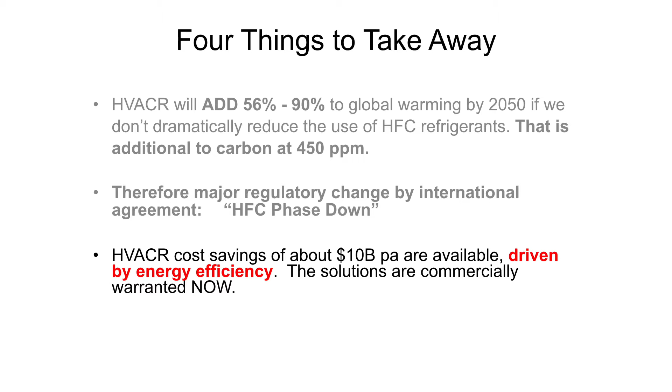In Australia, cost savings in the order of 10 billion per annum from energy efficiency in the industry. And because we're talking about a fundamental change in the refrigerants, future-proofing your investment in HVACR technology is about getting the refrigerant right.

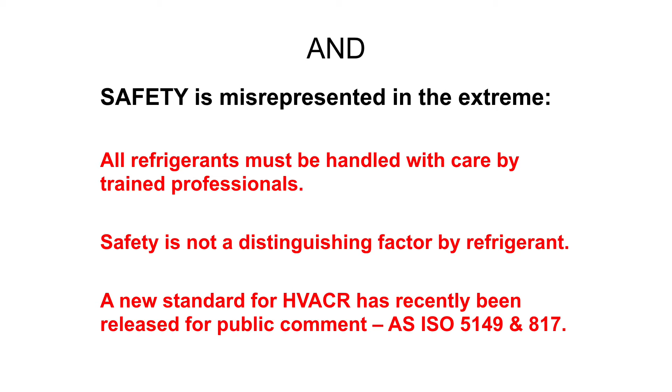I'll just touch on safety from time to time, but this is an important takeaway: safety in this industry is misrepresented in the extreme. The truth is that all refrigerants need to be handled with care by trained professionals. It's not a distinguishing factor by refrigerant—they're all dangerous. Competent people can make them safe, and the risk of an incident is vanishingly low. We're debating this matter nationally and globally because we have a new standard on the table.

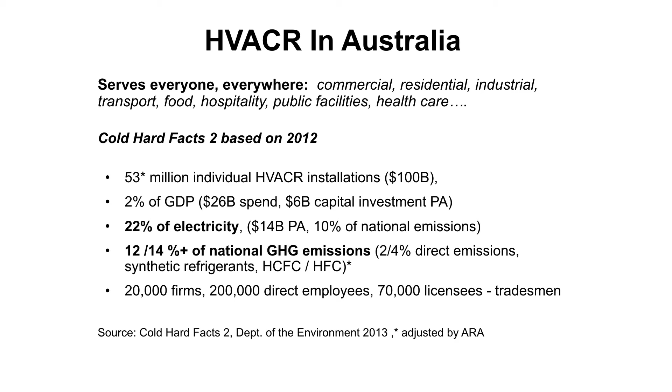Okay, so let me describe the industry. It impacts everyone everywhere, basically every industry. So 53 million installations worth about $100 billion in Australia. The industry consumes in excess of 22% of the electricity that we generate as a country. It generates, in my view, over 14% of national greenhouse gas emissions—I'll explain how I get to those numbers. And it's a highly decentralized industry: 70,000 tradesmen, 20,000 firms. How do you coordinate all of that? But that's the scope of the industry.

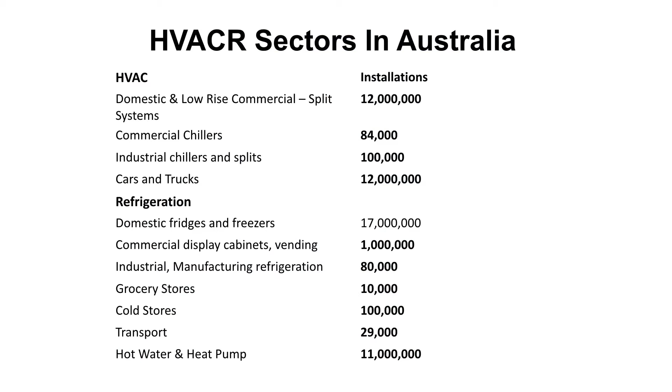Here's a breakdown by major sector, so you get a sense of the volume of installations. Of course, domestic, small units and motor vehicle air conditioning are big by number, but things like commercial chillers and grocery store installations are big by energy consumption and direct emissions. So we'll talk about that.

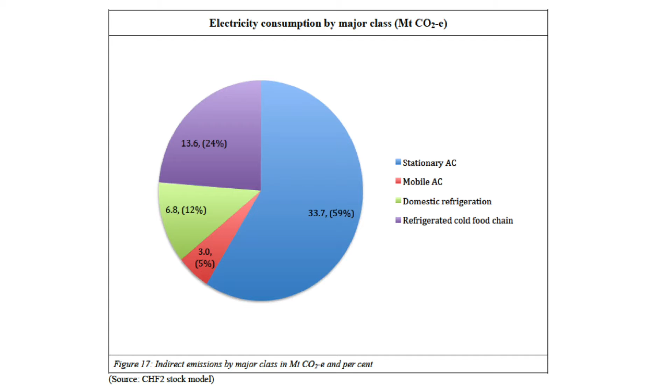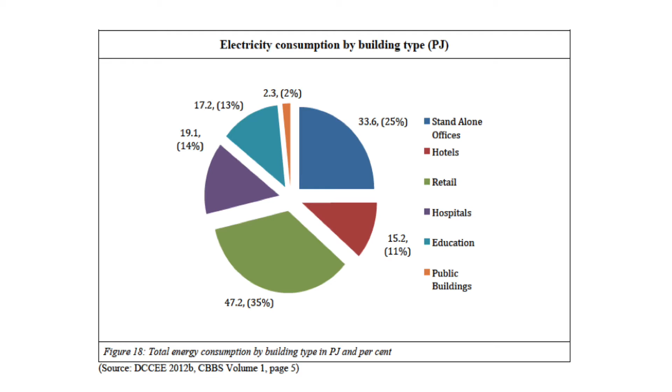Where does the electricity go? Today it's probably more like 60% going into air conditioning of all kinds, and 24% into the cold chain, which by the way isn't just about food—it's all kinds of things in the cold chain, but food's the one we think about. By building, in a sense, when I think about this chart, it's everywhere—there isn't a building discriminator.

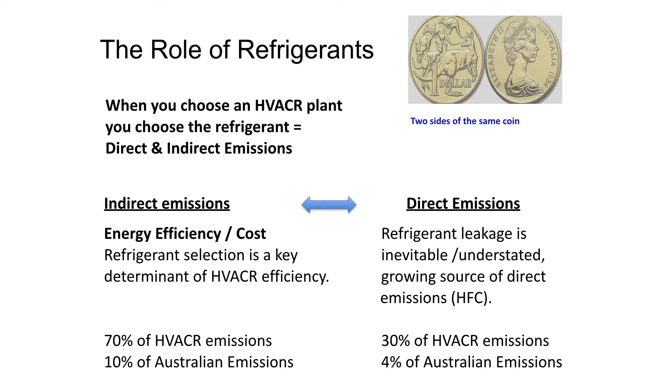So to understand the role of refrigerants, you need to understand that when you invest in a plant, or conduct a retrofit to align with the transition to low emissions, you're choosing indirect emissions through energy efficiency, and you're choosing direct emissions. So in Australia, 10% of national emissions are indirect in the HVACR industry, and about 4% is direct—and frankly, I think that number is higher, but I won't debate it.

So let's examine indirect emissions. The fact is that natural refrigerants are unarguably more energy efficient, better at heat transfer than synthetic refrigerants—that's just a physical fact. You can screw it up, right? You can have a good refrigerant and bad mechanical engineering and get low performance. But that's not the point. Use natural refrigerants properly with modern high-efficiency technology, and you will deliver, by definition, greater energy efficiency.

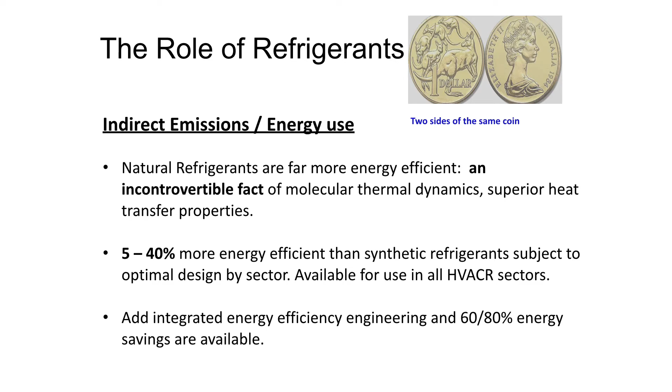So the range is extreme depending on the application. In motor vehicles, you might see in the order of 4 or 5% energy efficiency improvement, but in commercial and industrial refrigeration, in the order of 40%. Then add to that other ways of delivering energy efficiency, like better managing your heat load and control systems, and you can get up to 60 to 80% energy efficiency improvement. That's a concept I'll talk about later, but it's a very important idea.

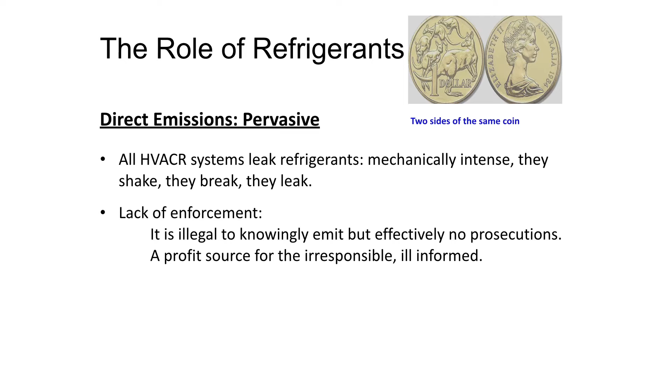Direct emissions: all refrigeration air conditioning systems leak refrigerants. They're mechanically intense, they shake, they break, they leak. This can be managed, but it's pretty much impossible to avoid direct emissions entirely—not the least of the reasons being that we don't enforce the prohibition. It's been illegal since 1995, and only one organization has been prosecuted. What's the message to the rest of the industry? Don't bother.

Particularly when it's in the interest of the technician or the service company to put more in during a recharge situation, therefore billing the client and making more money. Of course, as I say, low maintenance is an issue. And by the way, that big hit in terms of increase in direct emissions is principally the growth of HVACR in the developing world. But that doesn't let us off the hook, for reasons I'll explain.

So why are we in this crazy situation? Natural refrigerants are better in every way—I'll explain in more detail. And yet right now synthetics dominate the industry. Prior to 1930, naturals were the refrigerant of choice, in fact the only one.

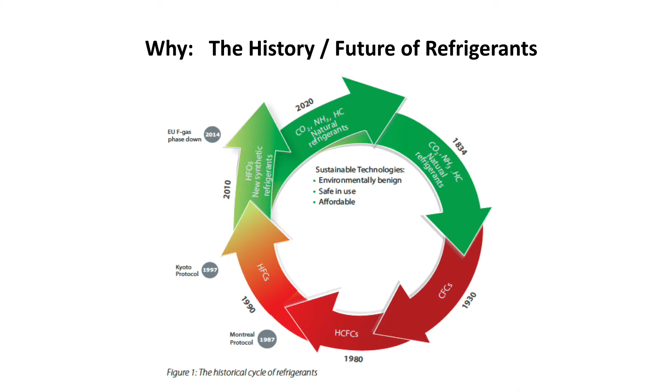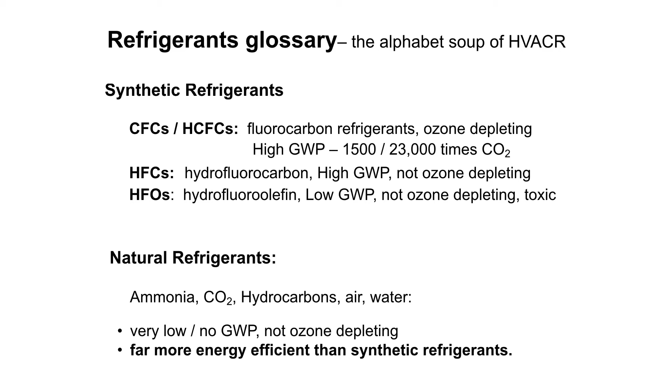Our engineering wasn't up to the task from a safety point of view, so we invented CFCs - problematic, leading to the Montreal Protocol. We invented HCFCs, slightly lower ozone depletion, both high GWP, and we're very close to getting rid of them. We moved on to HFCs, then the Kyoto Protocol. The future - and this chart I stole from Danfoss - Danfoss says the future is sustainable, low GWP refrigerants. The alphabet soup of the industry is tough to follow. The naturals - ammonia, CO2, hydrocarbons - effectively no GWP, not ozone depleting, far more energy efficient, and lower cost.

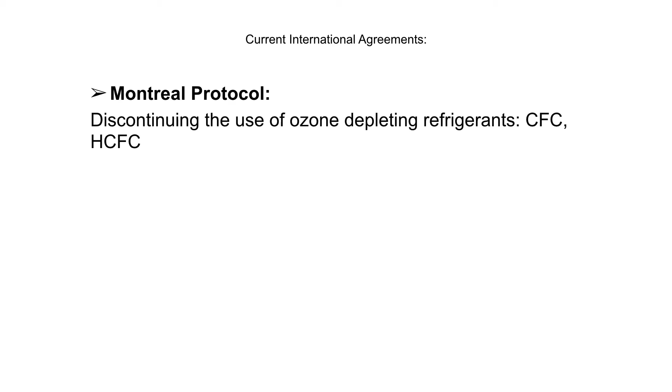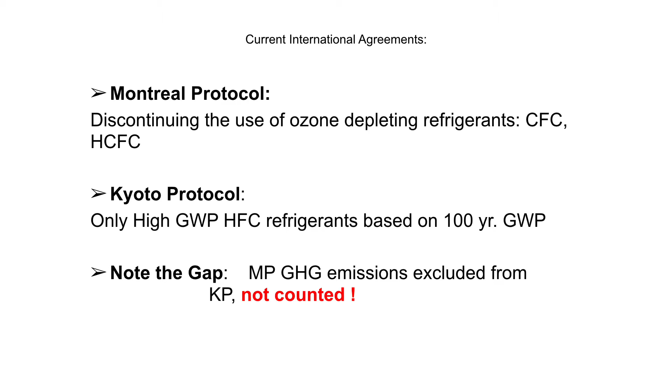So where are we right now in terms of international agreements? It's changing, but right now the Montreal Protocol is just about eliminating the use of ozone depleting refrigerants. That will change. The Kyoto Protocol is about counting the volume of emissions. But notice already a gap - the Kyoto Protocol does not count HCFCs and CFCs even though they're high GWP. This makes no sense, but that's the reality. And that's why our national inventory, in part, understates the presence.

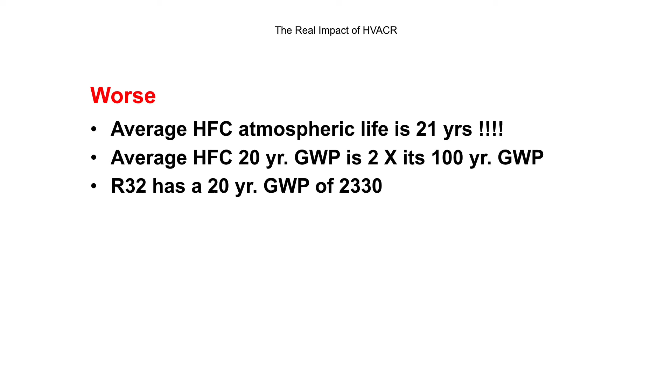Worse, the real impact of the industry is defined by these factors. The average HFC has an atmospheric life of 21 years. Its 20-year GWP is twice its 100-year GWP. So the Kyoto Protocol measures, and almost all of the work done in this field, talks about the global warming impact of HFCs based on their 100-year GWP. This makes no sense. R32 is a refrigerant being rolled out, promulgated worldwide, on the basis that it's a moderate GWP HFC - 675 on 100 years, 2,330 on 20 years.

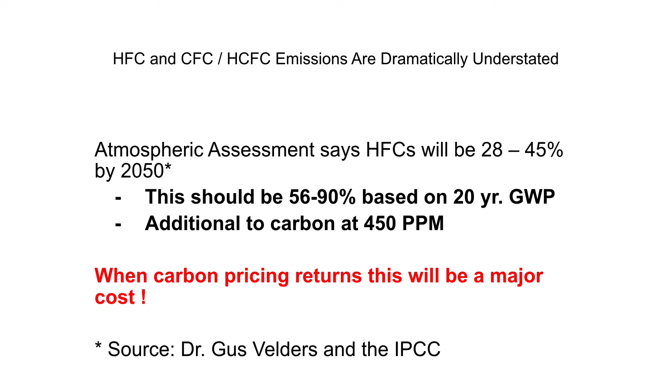From a cost point of view, it's inevitable we're going to have carbon pricing at some point in the future because it makes so much sense. When we have carbon pricing at 20-year GWPs, the cost of synthetic refrigerants will go through the roof.

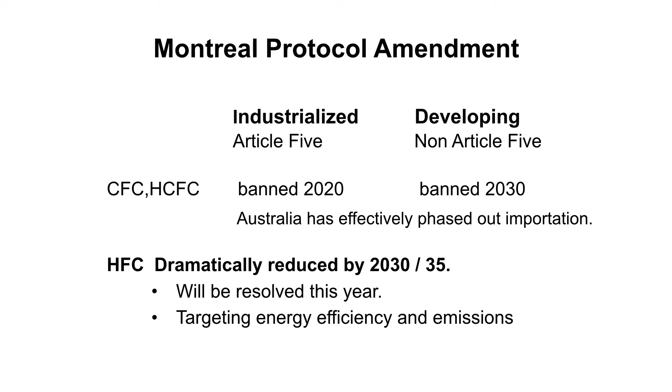Okay, where are we now in terms of the amendment? So right now, the Montreal Protocol says we'll phase out, ban the use of HCFCs, CFCs by 2020 in the developed world. Australia's already there - we're down to the last. Our quota right now, I think, is something like 2.5% of the baseline. So if you've got a machine using R22, you want to think about changing that soon, because the cost of R22 is going to go through the roof.

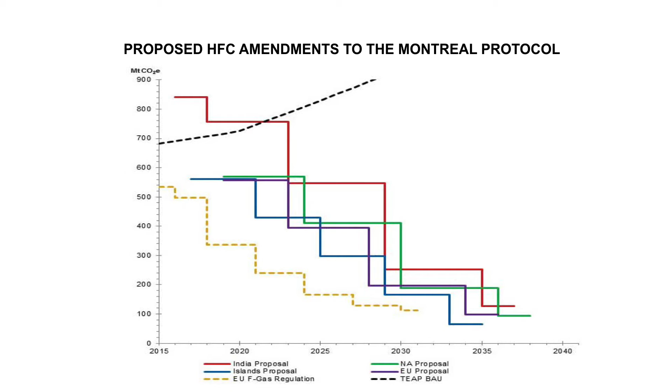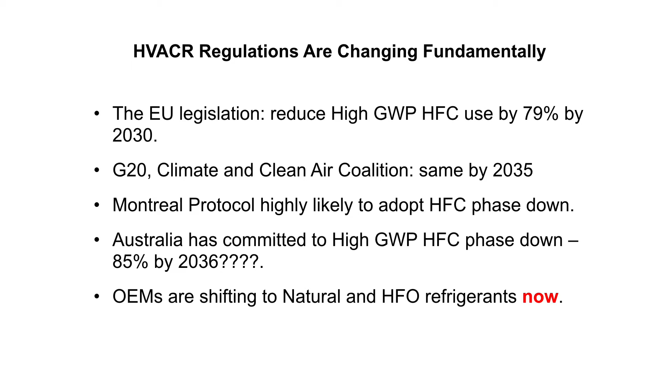Europe is moving ahead. So where are we? The EU legislation is in place, 79% phase down by 2030. The G20, Climate and Clean Air Coalition support this. It's highly likely, therefore, that by the end of this year, by 2016, the Montreal Protocol will be amended in the way that I've mentioned. OEMs are going to move ahead of these international agreements because it's obvious - because we have serious competitive pressures between naturals and synthetics, and that's going to drive both sides to change.

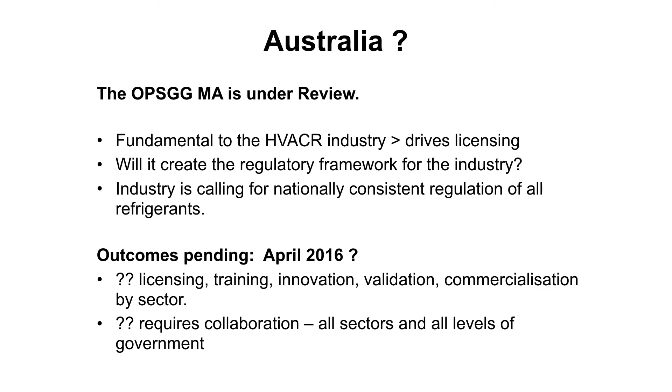And where's Australia? The foundation legislation in this field is the Ozone Protection and Synthetic Greenhouse Gases Management Act. It's been under review for 3 years. The industry, in response to the papers put by DOE, said we must have nationally consistent legislation that deals with all refrigerants. The papers put by DOE said the opposite of that. So we've got some rather fundamental issues to review, and it's not clear, given the risk of an election, that this is going to be dealt with anytime soon.

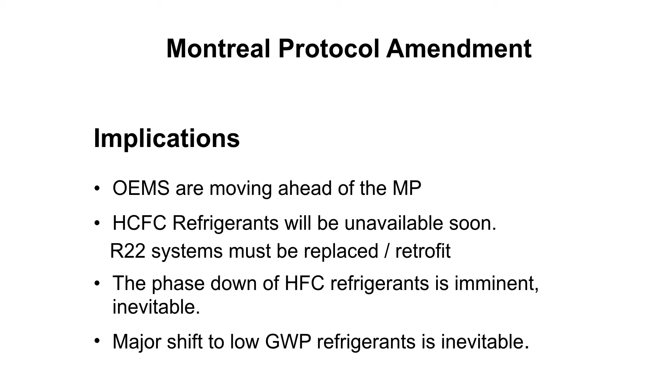As I say, OEMs are moving ahead. HCFCs in Australia will basically be unavailable in the very near future. The phase down of HFCs is imminent, and there will be a major shift to low GWP refrigerants.

So I can't give one of these talks without quoting Obama - take his wonderful words in that regard. Canada and the US have signed an agreement specifically calling for HFC phase down, but so have many other countries. Let me see if I got them there - China and India, those agreements are in place. You've got basically the vast majority of the world, the vast majority of the parties to the Montreal Protocol, agree we need an HFC phase down. One day we'll get them to say it properly.

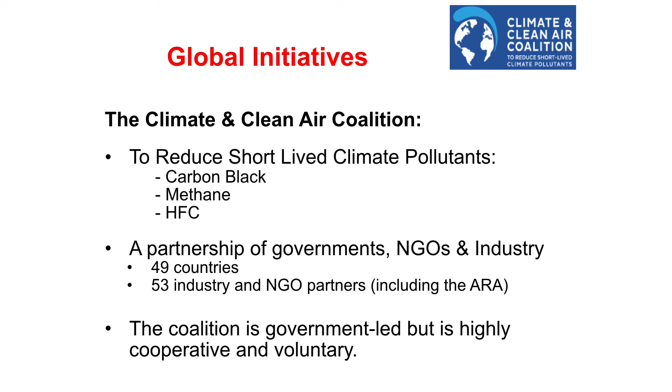What's happening globally? The Climate and Clean Air Coalition has - this is 49 countries, 53 industry partners, one of which is the Australian Refrigeration Association - calling for the reduced presence of short-lived climate pollutants, including the HFC initiative. This is a significant body shifting the difference.

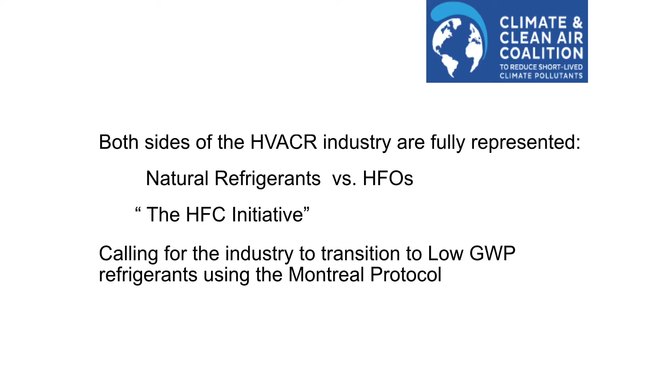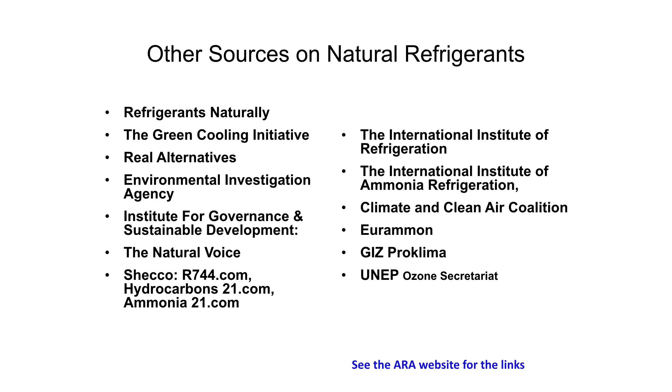By the way, the synthetics industry and the natural refrigerants industry, both well represented and both saying let's get on with this, let's get out of high GWP HFCs. The Consumer Goods Forum, you'll hear further from Ignacio on this important topic. Big companies, huge global revenue, unequivocally committed to the use of natural refrigerants. For these companies, refrigeration is mission critical, and it's very clear to them that naturals are the future. You can find all of these organizations on my website, which gives you a long list of sources on the topic.

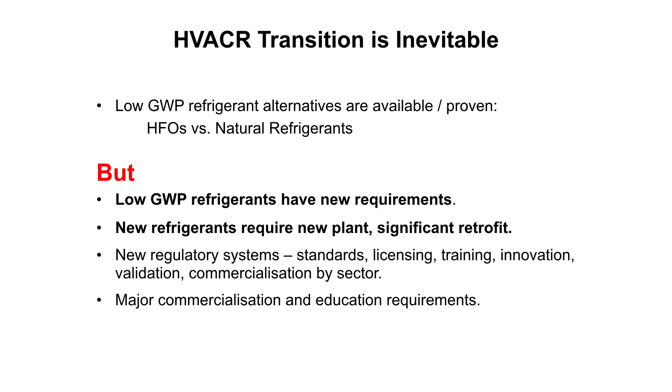As we move to natural refrigerants, we have to understand that low GWP refrigerants have different engineering and service requirements. Whether it's a retrofit or a brand new unit, it's going to be different equipment. That means most of the equipment worldwide over the next 15 to 20 years is going to get traded out, either by retrofit or replacement. With that comes a whole series of regulatory standards, training requirements, and a major commercialization exercise, because when you launch a new piece of equipment, you better have it independently validated, or it's not going to fly.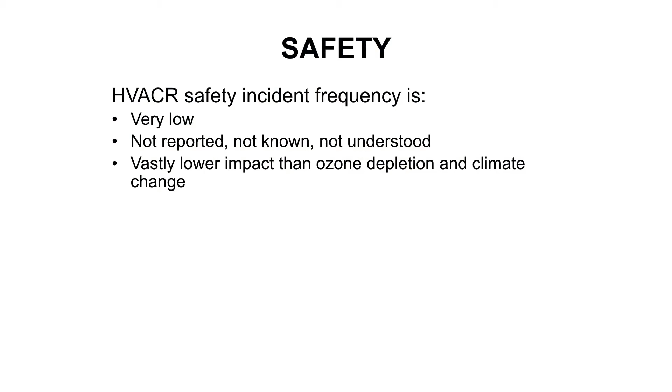I want to go back to the matter of safety because it really annoys me. Here's the situation: the frequency of incidents is vanishingly low. You talk to the work health and safety people at the state level, they don't even collect the data because it almost never happens. Worse than that, it's not known how significant an issue this is in the risk management sense, and worse still, we don't have decent independent research on the impact on technicians when they inhale synthetic refrigerants. My intuition, and the intuition of others, is it's not a good thing.

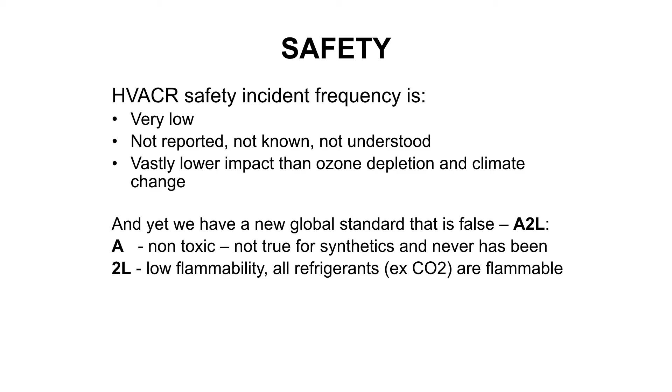An example of a standard that is on the table is the classification of moderate and low GWP refrigerants as A2L - A, non-toxic, L, low flammability. Both untrue. When you burn R32, you get hydrogen fluoride and carbonyl halides, which are among the most lethal chemicals on the planet, at the rate of 20 to 30% of the mass of the refrigerant. This topic does not appear in the standards.

Flammability: if you read the MSDS for R32, it says it's extremely flammable. If you read the standards, it says low flammability. Please help - which of these is right? The standards are a problem because the standards development process is vulnerable and fundamentally flawed.

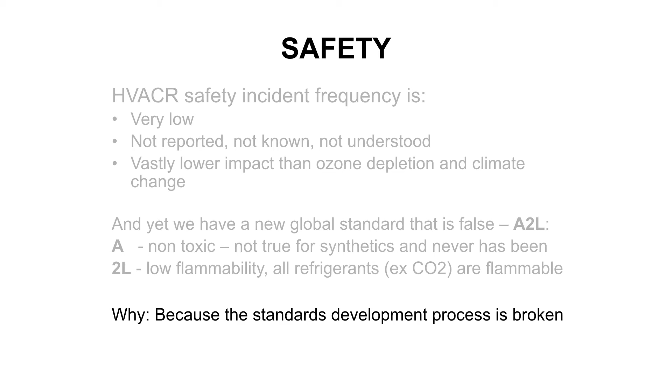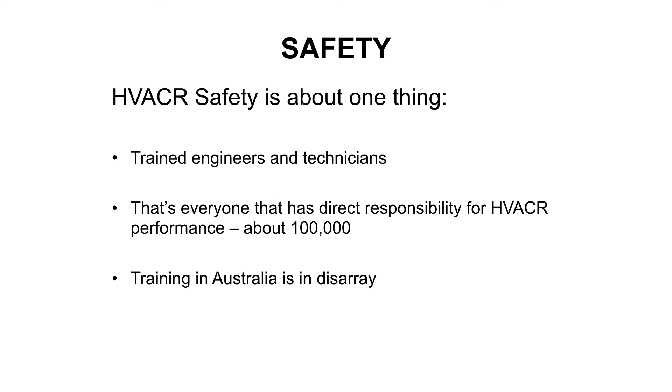The truth is, safety in HVACR is about one thing: trained engineers and technicians. That's everybody, including specifiers and facilitators. I reckon a very conservative number for that is 100,000 people in Australia alone - a huge educational requirement, far more than anything I've ever seen in my career. Right now, we have discussion being led by the federal government which is fundamentally undermining TAFE. Yet if you look at TAFE schools across the country, they have wonderful facilities with wonderful teachers. There's got to be a better way to fix them than simply competing with private RTOs.

So my point is, the industry has the opportunity to reduce the energy cost by 60%, or around $8 billion, and reduce greenhouse gas emissions by 50% - that's 7% of national emissions. Those opportunities are commercially warranted by the energy efficiency principally, but there's a huge amount of work to do.

Despite that situation, because of the nature of the competitive confrontation, you can expect a high degree of obfuscation going forward - it's the nature of the industry. When you research it, when you study it, triple check everything. Where does that information come from? How's it been validated? Does it make sense? If you don't do those checks, you won't get it right.

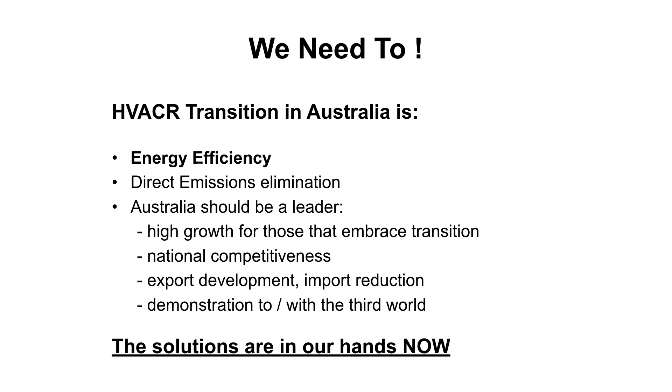What is transition in Australia? Driven by energy efficiency, eliminating direct emissions by using very low GWP materials. Australia should be a leader. There is high growth for those companies that engage and take this opportunity. It will influence our national competitiveness. It is an export development opportunity because we have great leadership in this field, and you'll hear them today. There's a major opportunity - we could avoid about $1 billion in imports by avoiding synthetics.

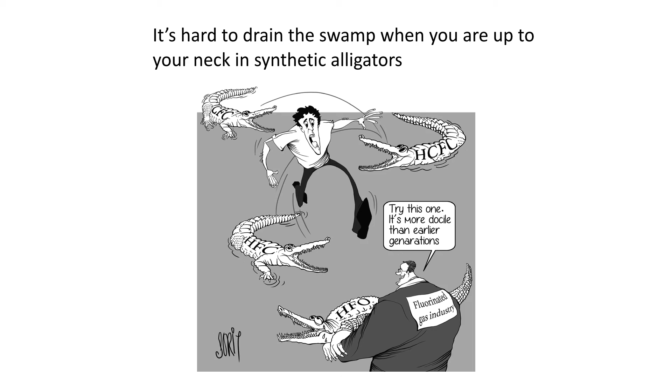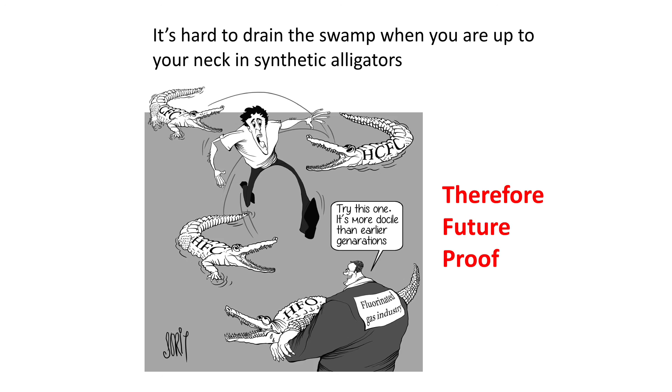Almost as important is guiding and working with the third world to facilitate and accelerate their phase out. I stole this from the Environmental Investigation Agency. The situation today is we have an industry dominated by synthetic refrigerants. It's hard to drain that swamp because of the dominance. The sensible thing to do when you're looking at an HVACR plant is future-proof: choose a refrigerant that is not going to get phased out and is not toxic.

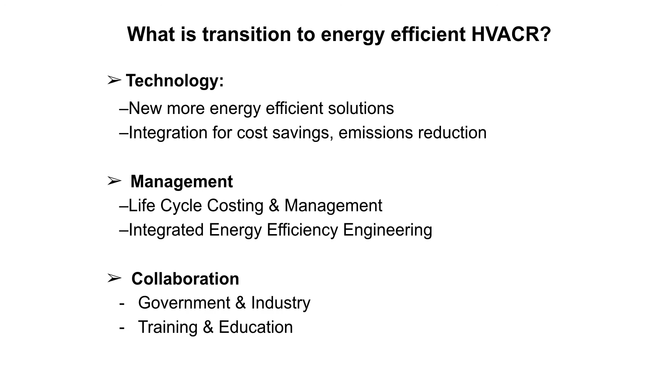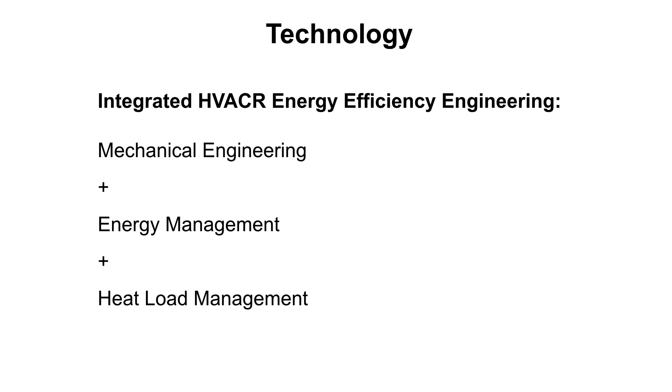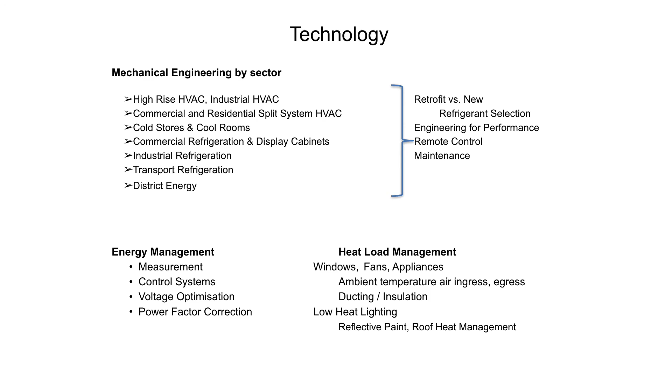So I'm going to talk this afternoon about the factors that determine transition to energy efficiency in the HVACR, but in brief, they are those. As I said earlier, integrated energy efficiency is absolutely fundamental. It's not enough to get the mechanical engineering right if the windows are open, or the insulation is substandard, or the ducting is substandard or low quality. Energy management is critical. This is a quick listing of all of the dimensions and sectors that need to be addressed - innovation in every single dimension of the industry, and therefore the huge requirement for research, training, and education of the industry at large.